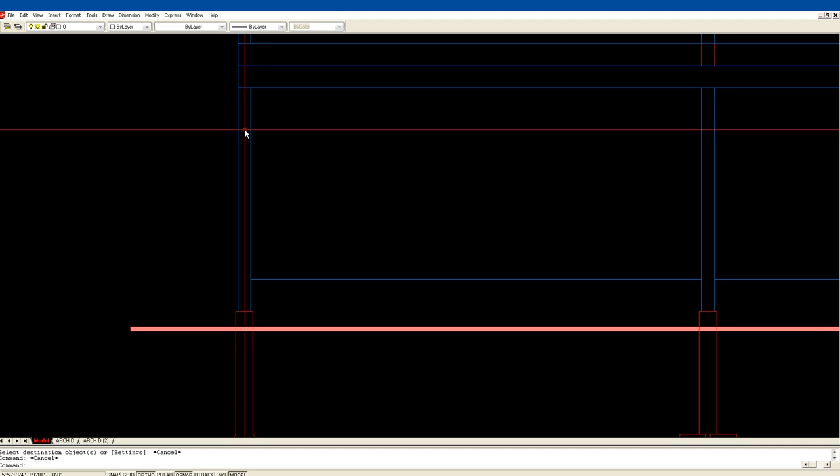Good enough. Okay, let's match properties, clean up a bit. I'm just going to bring this down. Close enough.

So these are the posts holding up this beam that's running along here, holding up my floor joist. This span for this beam is doable, but it's going to be a very heavy, expensive beam, more than likely 2x12s, more than likely 4 of them, which means we'd have to make our posts bigger, and we can do it if the client really wants it. But the simplest way is to put another post in the middle.

So if I drew a line from here to here, I can find the middle, which is right there. Offset 3 inches, and then I'm just going to copy. I'm going to take this one. These don't have to have a super big footing. I'm just going to put it right there.

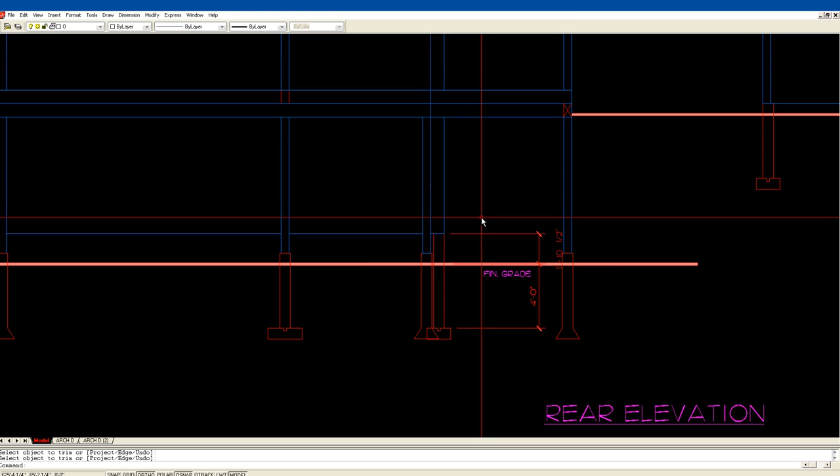Okay, I'm going to trim this line. There we go. That's great. So trim, that doesn't show. So we put another post in. Let's do the same on this side. Now this will block his view from the back of the house, from the basement end of it, but it's still the most economical way of doing it.

Okay, I'm getting lost here. Let's get a line from there to there and then offset 3. There's a construction line for my next post. Then I'm going to copy that, all of that, and this post, and go from there to there. Then I'm going to erase the construction lines. And there's a construction line, there it is, and trim. So that's a nice easy way of doing it.

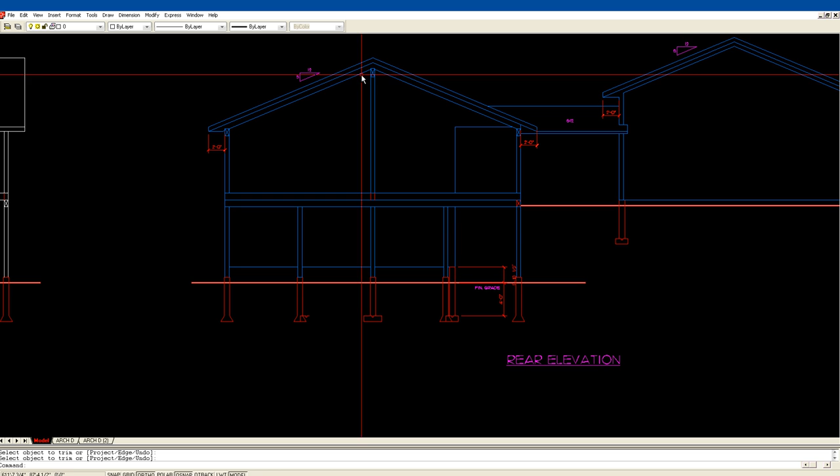Up here we have these 14-inch rafters running across. They'll easily hold that snow load from one beam right in the center, so we'll just leave the one post. Won't block his view as much from his living room, and I'm sure that's what he wants.

From the rest here we'll need a railing. Any deck that's over 18 inches off the ground has to have a railing, and it has to be 42 inches high. So we're going to offset 42 inches, and then 2 inches down below. That's going to be the top of our railing. Then we're going to offset a railing, by code, can't have an opening more than 4 inches for some little kid to squeeze through. So, 4 inches from the floor of the deck.

And we're just going to get rid of these. So that's our top and bottom rail. He can build it out of 2x6, he can build it out of metal, and glass. There's all sorts of things he can build it out of. Get rid of this.

The house is behind the railing. I got to get in closer. Alright, so we'll show that the railing is in front of the house.

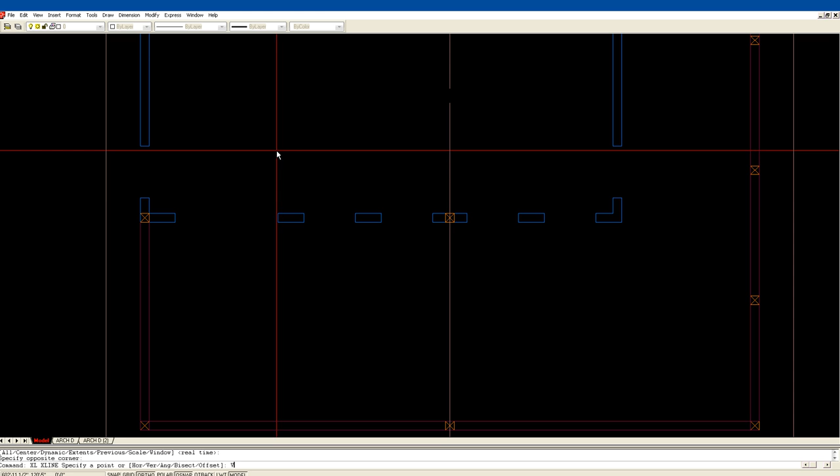There we go. Before we go too much further, let's put the windows in. We know where the position of them is from this plan. So construction line, vertical. Okay, that's door. Window, another one. We've already noted on the plan that there's rake windows over top.

Okay, we're going to do it the same way. We're going to offset 80 inches, that'll be the top of our main windows. Offset 80 from the floor, so that'll be the top of our windows. And we can clean up.

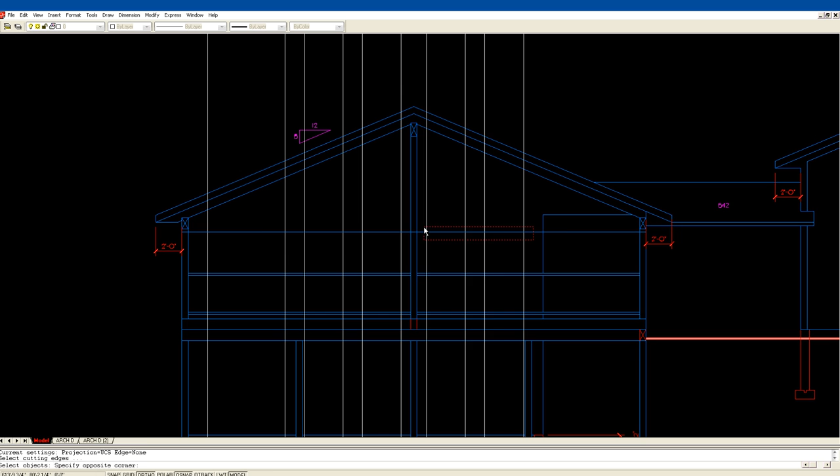And our door, actually. Okay, and then F again. We know that our windows are 6 feet in height, so we'll offset 6 feet. So that's the bottom of our window.

You know what we're going to do? Right at this point, we're going to take this line, these lines, this line, this line, this line, and that one we got - let's do it again. Was that one and that one, and that one and that one, and these guys, we're going to put them on the railing layer. RL, there it is. And then we're going to layer off RL.

Now we can clean up these windows. I'm just going to trim. These are the sides of the windows. And we are going to go to that - where's the other one? That and that. Okay, I should have done both. Select that, get rid of these. There.

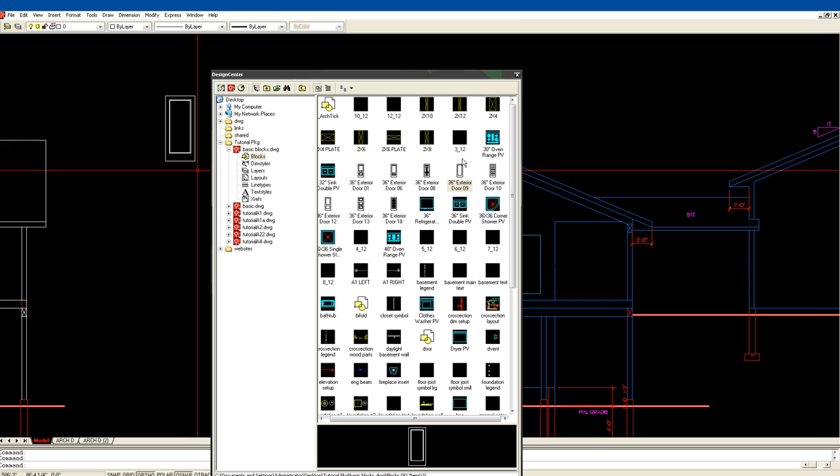Okay, I'm going to move it to this corner, and then I'm going to copy. I can explode because they were blocks, and then I'm just going to put them all on the door layer, DR. There we go.

Okay, we already talked about windows. I could put windows in like that, they would just fit right in here. You can do it. Okay, so let's copy. I'll put one there. Put one there. Okay, now these windows I probably won't open. What do I do here? Okay, we're just going to leave it.

So I could let's just copy all of that, put it right there. Okay. Whoops. What do I want to do? I'll just take this.

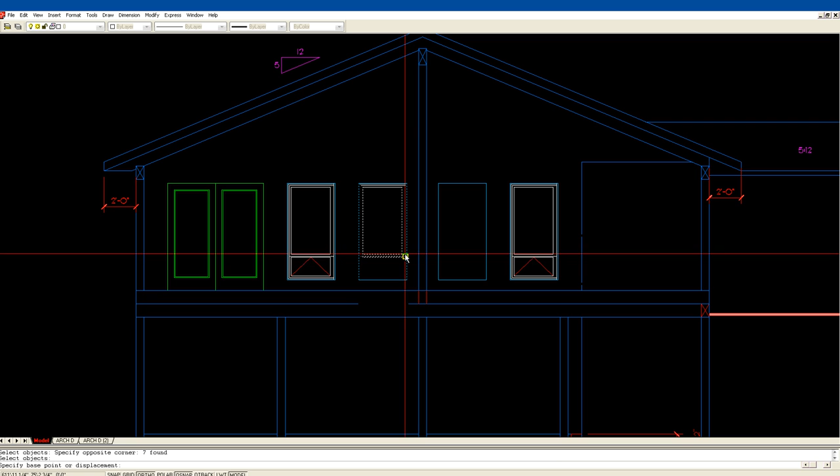Why is that doing that? Oh, because it doesn't go right across. Okay, stretch. And I'm going to pick. Well, there is no point there. Okay, object tracking on, and then right to there, and there. That's better. Then just clean them up, okay, or not.

Get rid of this. And copy. Okay, I'm just going to leave it like that. Match properties. So this whole thing's on here. Or I could, I hate to not finish it. Okay, let's finish it. I'm going to erase.

No, I'm not. I'm going to copy this whole thing to here. Okay, and then I'm going to erase this lower portion. Okay, and then I'm going to stretch. Anyway I do it, I'm screwed. And lines. There we go. Okay.

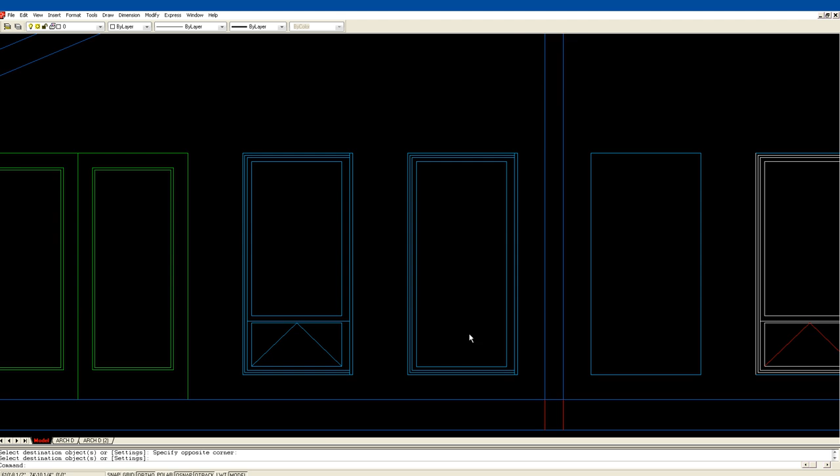And then copy. Okay, so any version of that, I don't like them, and I'm going to change them. You can see what I did when I inverted that first XO window. This is actually the bottom of the window, so I would have had to play around with it a bit more. Okay, I'm going to put my railing layer back on.

Railing. Okay, now at this point I'm not going to trim all of these lines like I did this. I don't know what kind of railing he wants, and if he has something picked out I can show it on his drawing again, but at this point just to do a normal railing, just a symbol for a railing, I'm just going to use a hatch pattern.

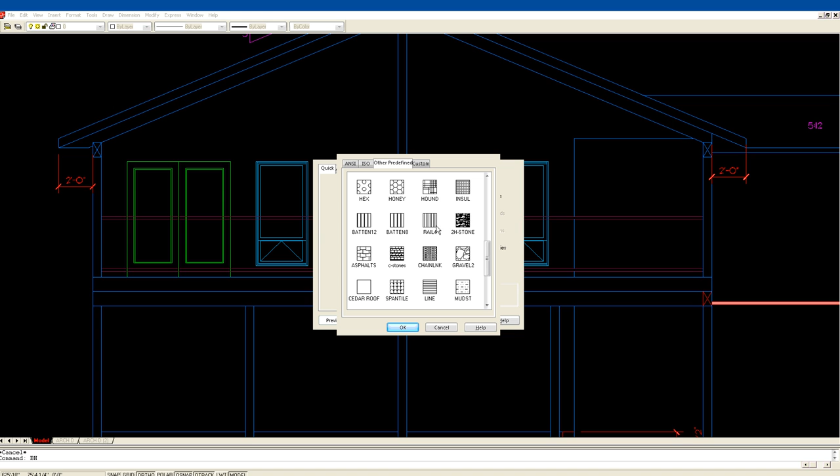And I'm going to go to railing 4, okay, which is a vertical siding pattern that I've just made to be a little bit denser, so everything's at 4 inches instead of 8 inches. Okay, the scale would be 1. Okay, and I'm just going to pick that.

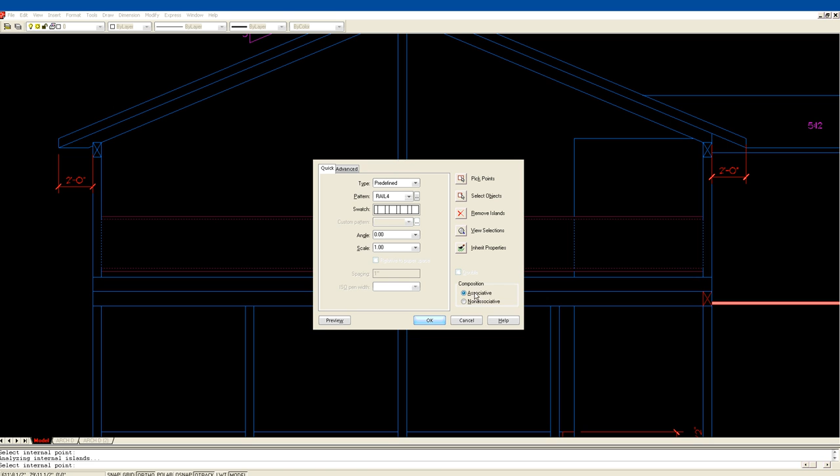You know what I'm going to do? I'm going to cancel. I'm going to turn layer off, window, comma, door. Okay, now I'm going to do B hatch, and I'm going to pick railing, pattern rail. Okay, and then I'm going to pick points. That's so much simpler. Okay, match properties.

I'm going to put everything on the railing layer. Okay, then I'm going to turn all my layers on. Okay, again, I could go ahead and trim all those lines. It would take a long time, and I'm not going to. Okay, not for a preliminary drawing.

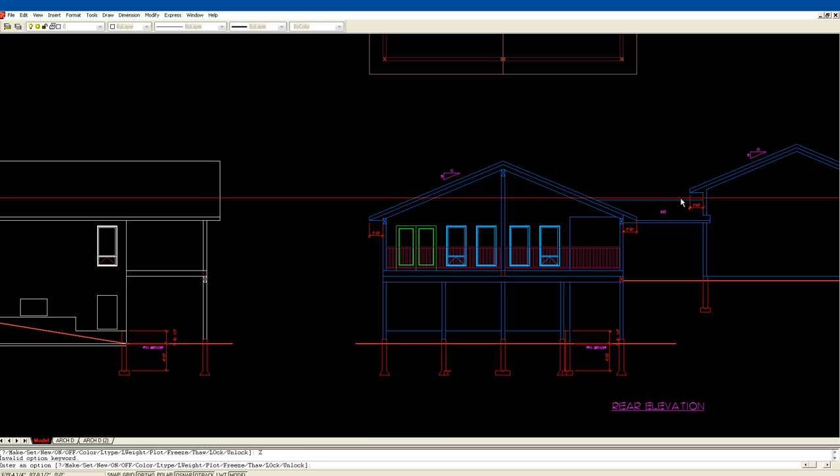Okay, now down below, we haven't drawn a basement plan, so I'm going to present this idea to him. I am going to just whatever I've got up above here, I'm going to put down below. Okay, so I am going to

first establish where my ground wants to be, so offset 4. Okay, actually offset 8. Or the 8 inches above the ground with anything that's wood. Okay, and then I'm going to turn my railing off, layer RL,

and I'm going to copy. Whoops, copy. Okay, all of this. From there right to there. Okay, I am going to trim that. Okay, trim.

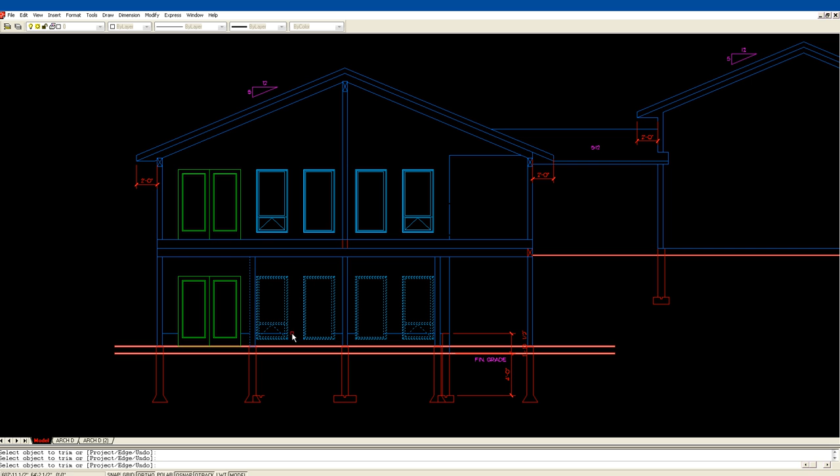Let's see if we can get in here. Okay. Okay, I'm going to zoom in.

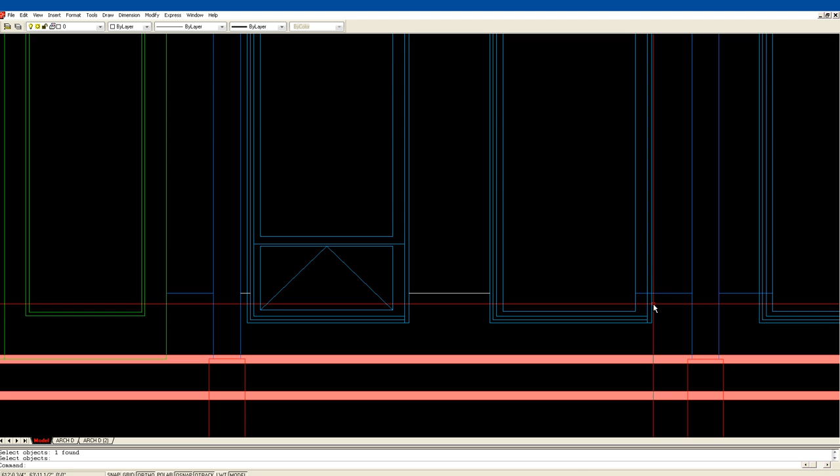Just do this a different way. Straight across, down to there. Okay, and trim. Erase. Okay, erase. Nope, trim. Okay, trim.

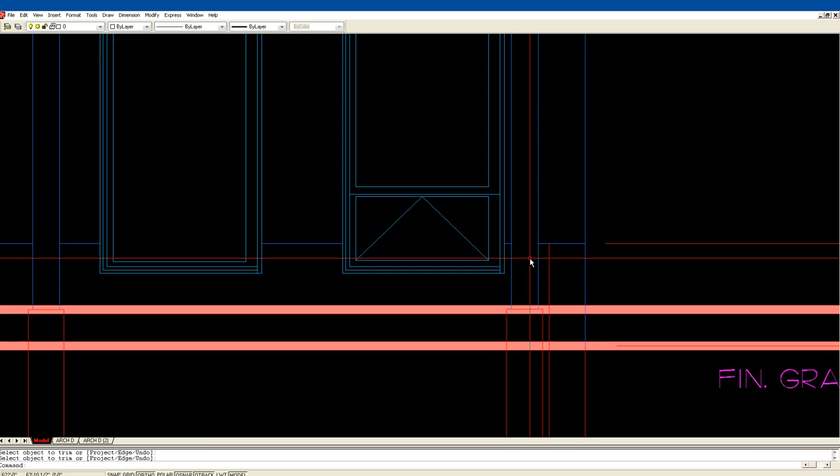Okay, this one. So that back blue line is the top of my concrete. I won't bring siding down any lower than that. I'll match properties here.

Okay, so all the windows are done on the back of the house except for these rake windows. Okay, I'm going to draw a line. Oops.

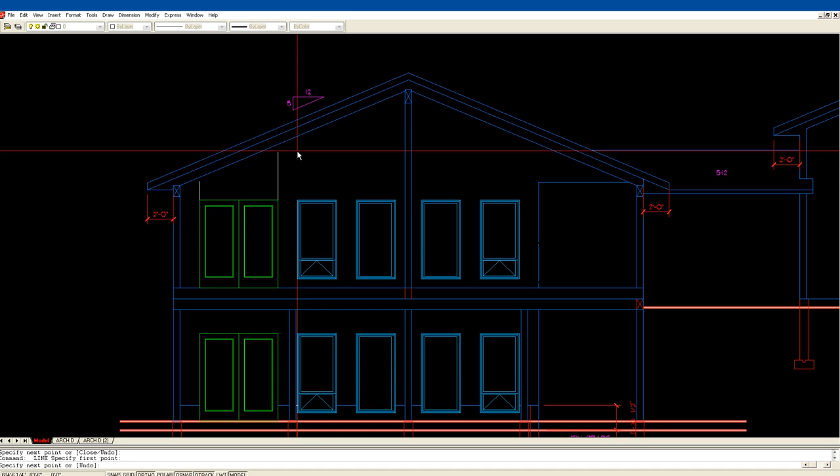Okay, this is my ceiling height, the bottom of the rafters. I want to stay down at least 12 inches. I want a lot of room in there for drywall, casings. I want to stay at least 12 inches below.

In fact, I'm supporting all my weight in headers right above here, right above these windows. So the framing will have headers in here. Up above, we'll just go to the weight will be supported by these rafters.

So offset, I need 14 inches. We've already talked about it. Okay, so that will be the bottom of the rake windows, and that will be the top.

So if I fillet, maybe I'll trim. Okay, and then fillet. Okay, so I can copy this line from here to here and fillet. Okay, offset, or just copy, I guess. Okay, this is my leaving for my beam up the top, those bottom windows.

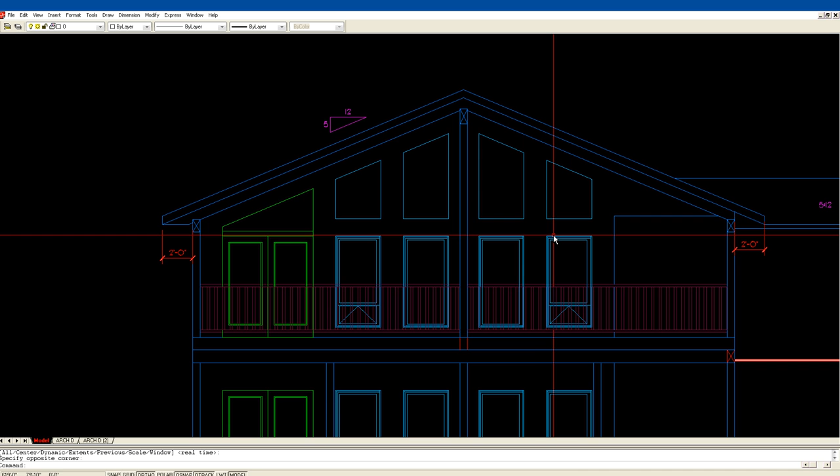I would probably leave all these windows just as rectangles. Okay, I only did that for the video. Okay, so rear elevation, and get rid of this construction line now, showing the back of the house.

This would just be siding. I've shown some trim on here. I can show some trim on here as well. Offset 6.

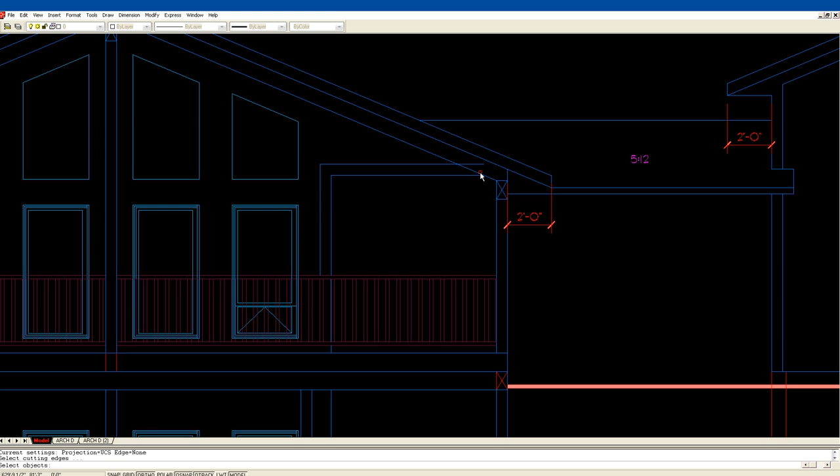I'm going to just leave it like that. The railing kind of gets in my way there. Okay, we have a post there, so you're not going to see much trim. This is all open, showing the windows. Okay, I'm going to leave it like that.

Okay, presentation. We can turn all these things onto the wall there. This actually wouldn't show, that's a construction line. These are dotted lines just showing how we're doing the elevation. We can put all these guys on the window layer.

Okay, put them on a window. Oh, there's wall, window. Oh, okay, explode the blocks. And match properties.

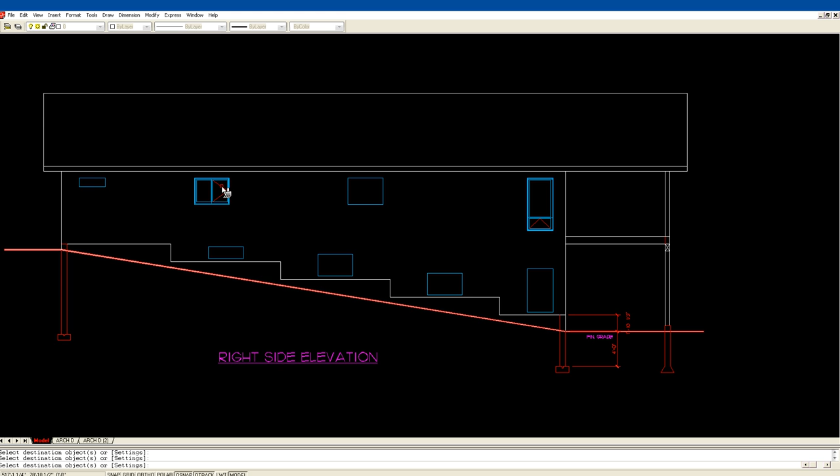There we go. Okay, match properties. Okay, and then everything else goes on the wall there.

Okay, and you will see why here in a minute when we do presentation. Okay. We should show some railing here.

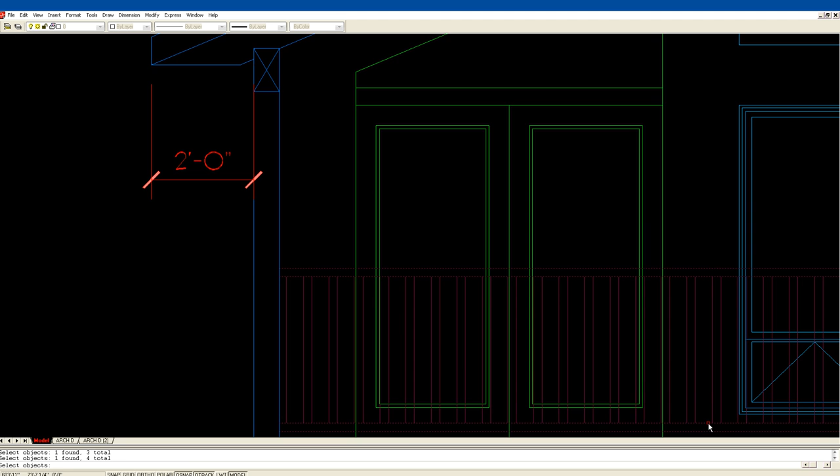Okay, so we can zoom and we can copy these two lines and these two lines from, let's say, right there, and then go down to our other drawing here, wherever, there it is. Okay, trim.

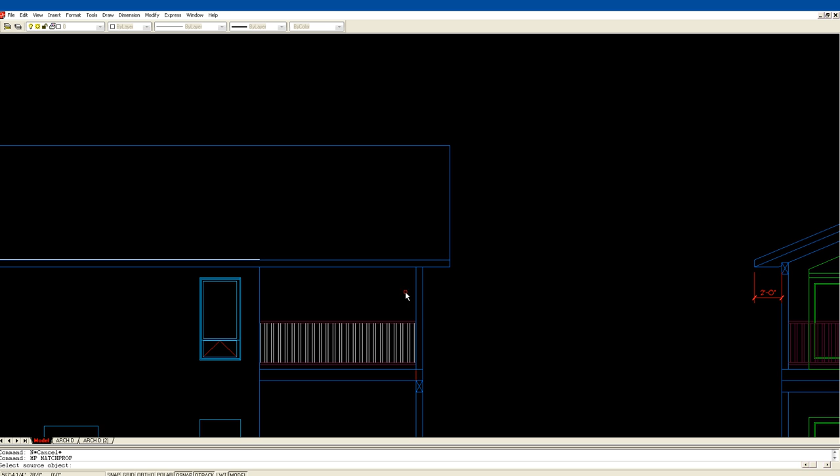And then hatch, we're already set up. And then match properties. Okay, what are we missing here? Match properties.

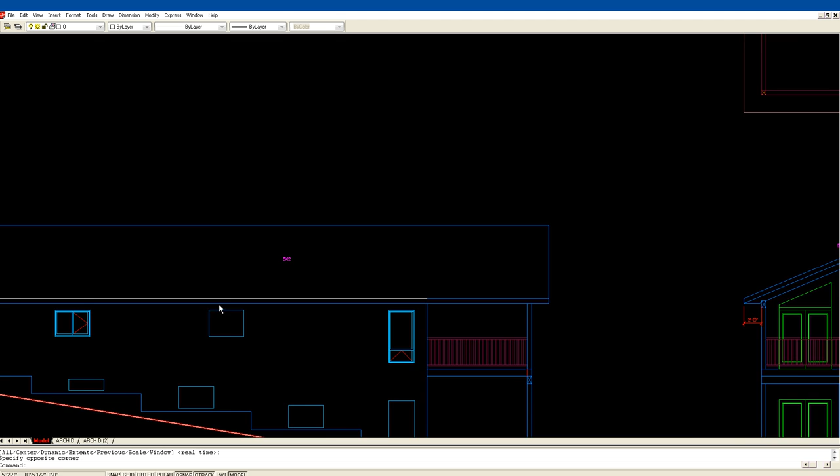Okay, I'm going to just steal this, copy that little thing there to show that it's a 5/12 pitch. I got that white line in there.

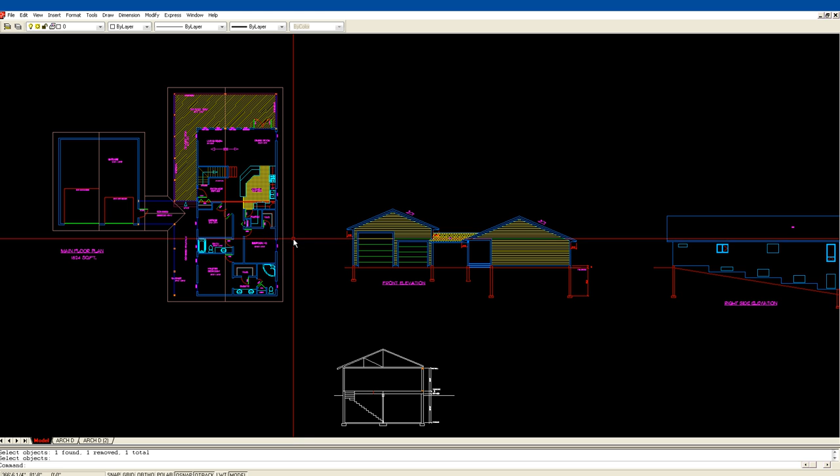And then take this one out. There you go. Okay, so there's my 3 drawings. This is my floor plan. Well, we need to do a little more on the floor plan here.

I'm going to turn the hatch layer off, and we should show some dimensions here, just basic dimensions. We're not going to get too far along. Let's set them up here.

I'm going to just jump right in. Dim, to get into dimension cycle, and horizontal. My first point is going to be this corner, and I'm just going to show the width. I'm not going to bother showing where these walls are. So from there to there. Now in this direction, I've got a 2-foot overhang, and I kind of want to keep everything proportional, so I'm going to go 4 feet.

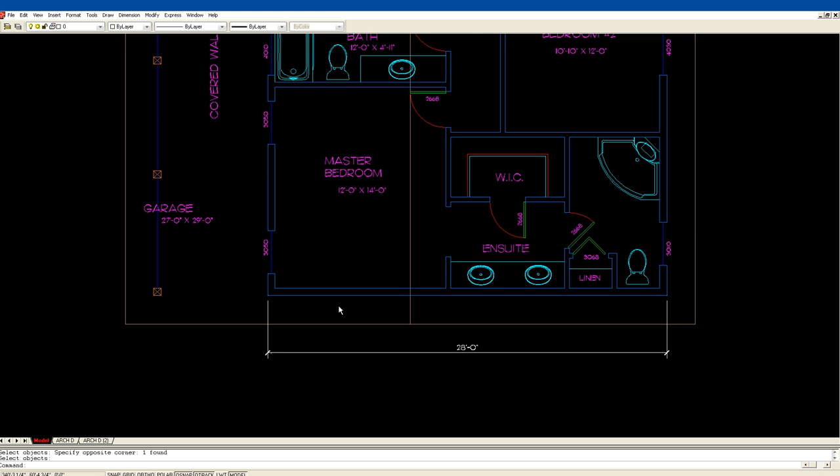Okay, that didn't work. Offset 24. Let's just take this line, and then we'll stretch this dimension down. Erase. So that's kind of a proportional, nice look to the drawing.

From there, I'm going to get back into dim and I'm going to go continuous. I'm going to tell it that I want to continue from here and go to there. And then I want to just keep going, showing the edge of this garage. Enter. I'm going to turn O-track off.

Back into dimension, I'm still in continued and I'm going to go to this corner of the house. Nice and simple. Then I'm going to use a base dimension, so BASE, and I have my dimension style set up to be a base of 24 inches. Enter. I'm going to go from somewhere around here, and back to here, showing all of the major jogs. I'm just going to move this into the center a little bit more.

I am going to change all of these dimensions onto the dim layer. Match properties.

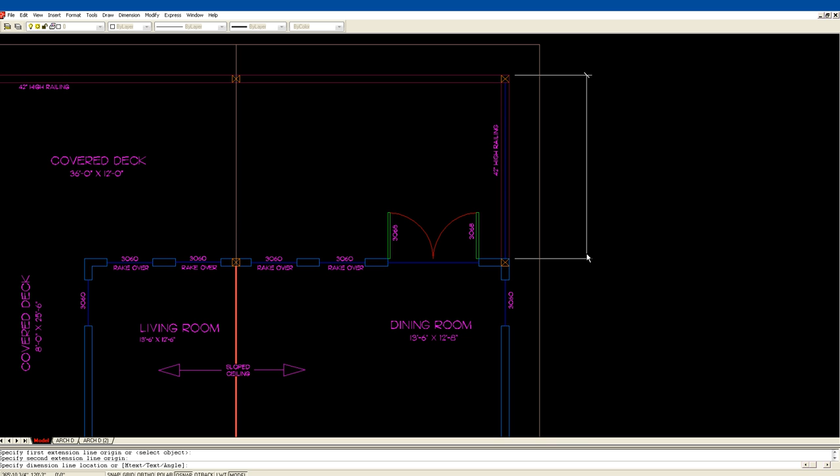Now I'm going to do a vertical, so DIM, VR, and I'm going to get a little closer. I'm going to pick that corner and go to here, in that direction 4 feet, enter. Okay, well, it worked that time.

So dim continued. Again, I'm not going to show window centers at this point. I'll save that for working drawings. I'm just going to pick, if I can get it, right on that corner. Baseline.

I'm going to just press enter to select where I want to start my base from, right there. I'm going to go back to there. So now I'm showing the total length that we're using, and MP.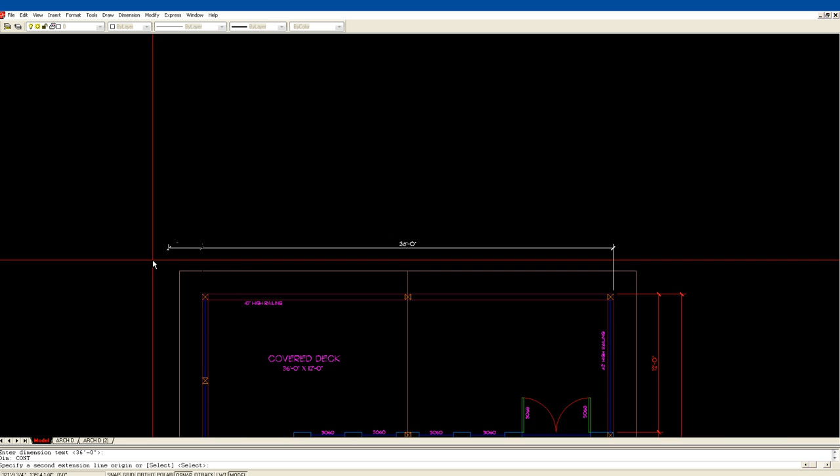I'll do along the back, so DIM, horizontal. Again, I'm going to zoom in. I want this corner, I want to go 4 feet, and continued. There, back into continued. And then base. Enter.

I want to select there to there. Enter. Match properties.

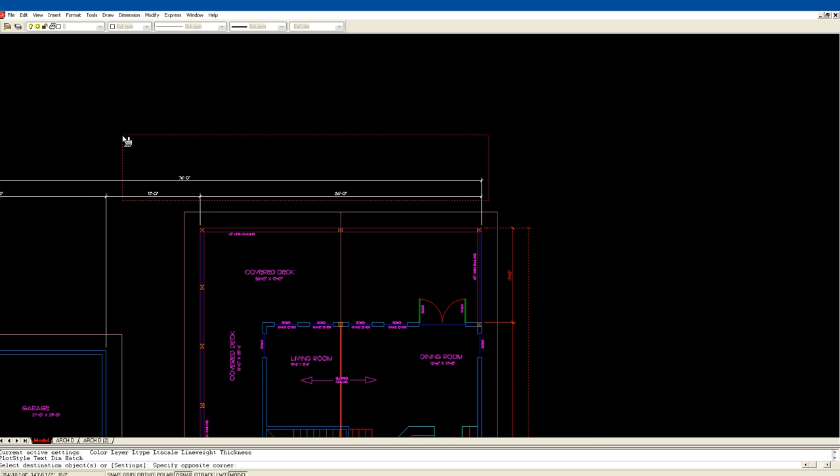Got them. One more down this side. So DIM, vertical, and I'm going to pick that point to that point, and go out 4 feet. Okay, and that didn't work. Oh, because I connected to here, right there. And then dim continued.

It's going to continue from there. Actually, I'm just going to press enter because sometimes it gets confused. Right there. And I'm going to zoom in a bit. I don't know if I got it or not. Yep, 30 feet.

And then base, and again I'm going to press enter so I can select. Nope. Baseline. No, it's got it. We'll go to there. Here we are.

Now we should have continued. Let's do that. DIM continued. Enter, so I can select. And I'm going to pick this one, and go to here. Enter. And then I'm just going to get out of dimensions, highlight that one, and bring it down.

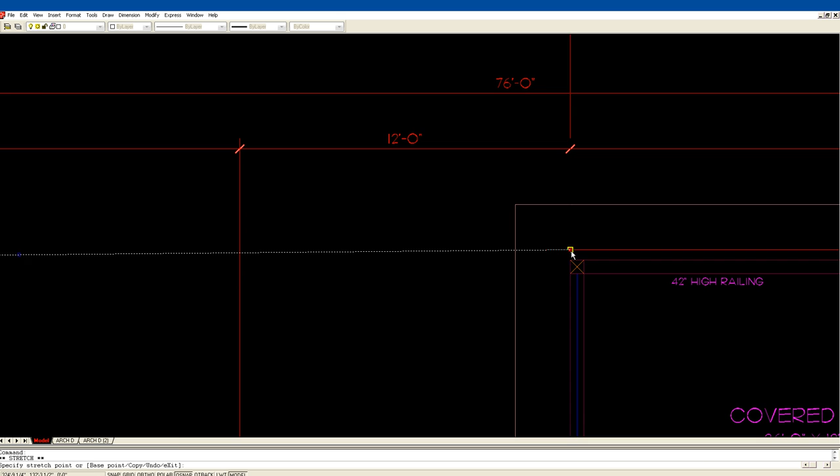I worked for some companies that hated having dimension lines cross each other, and so if you use that sort of theory, you would do something like that. You can draw a line across here. Well, make sure it's straight. And you can put it on a layer that shows a very light line, for instance, your hidden layer.

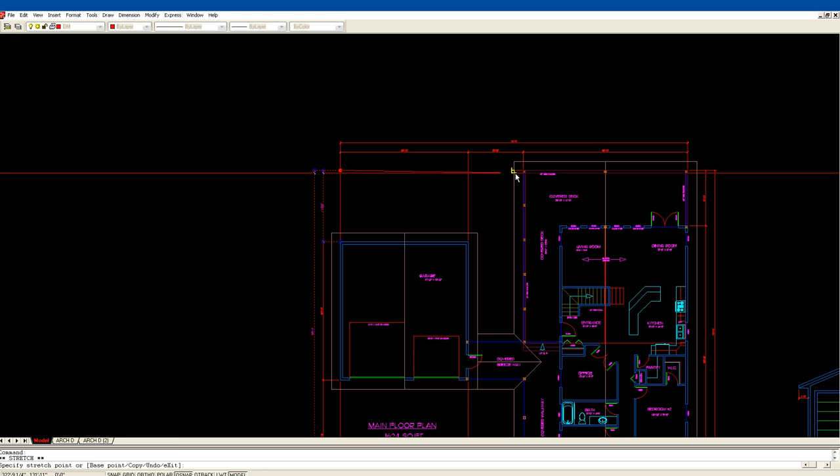Or I'm going to just pick the roof layer, and I'm just going to show it right like that. Or if you don't subscribe, you can just bring it across. Just make sure it's straight. There you go. Whichever way you like to do it.

So that's some dimensions. Now we'll get ready for printing it or plotting it, and we'll do that in the next tutorial.